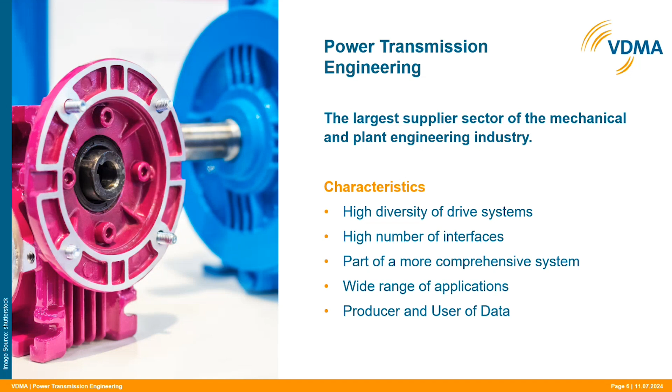In general, power transmission engineering is the largest supplier sector of the mechanical and plant engineering industry, with a high diversity of drive systems and a high number of interfaces. It's often part of a more comprehensive system and has a wide range of applications. We are on the one hand the producer of data, but on the other hand also the user of the data. For this, we have quite a central role in the mechanical and plant engineering industry.

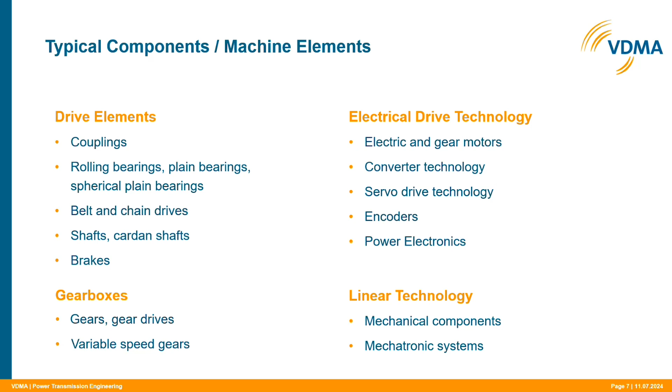In the VDMA alone, in our Drive Technology Association, we're representing over 200 member companies. This means we are covering approximately 85% of the German power transmission market. Members of our association employ over 90,000 employees in the sector. We have a turnover of 18.2 billion euros. The exports are 17.3 billion euros and the imports 10.2 billion euros, and that's only the mechanical part, because in the VDMA we only have statistics about the mechanical drive technology components, so the electrical drive components should be on top.

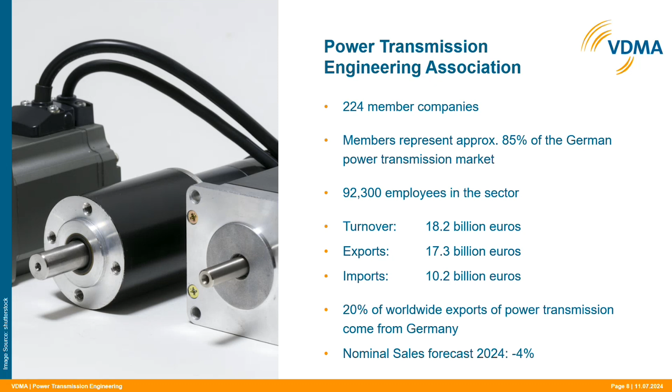Worldwide, power transmission engineering from Germany has an export rate of 20%, and at the moment, the forecast for nominal sales for 2024 is minus 4%.

Let's take a look at the reason why we started the standardization and also the use cases we addressed. In general, why did we decide to become active in the field of OPC UA? Industry 4.0, in the overall context, offers the potential to establish new opportunities in terms of process optimization, new business models through digitalization and the networking of products and production, and hierarchical communication is dissolved within Industry 4.0 processes in favor of seamless networks.

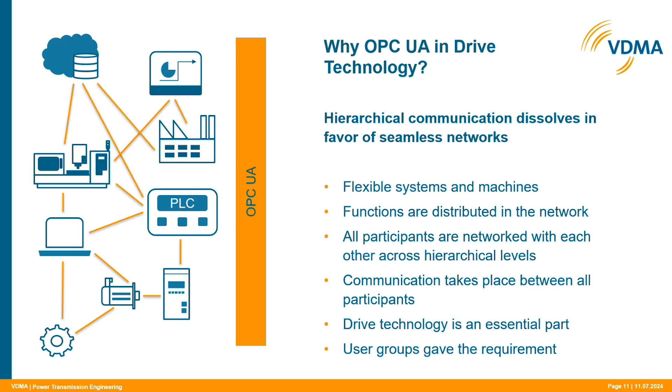The motivation for starting the OPC UA activities was based on the discussions, challenges, and wishes we received from the user industries. So our aim is to reduce the engineering effort by using cross-manufacturer interoperable information models. We want to add additional standardized services for OEMs and plant operators.

We want to ensure a seamless integration of our companion spec for the powertrain in other industry-specific OPC UA companion specifications. And we want to focus on user-centric use cases for vertical communication in the production. We quickly realized that drive technology is such a central field that a high degree of networking is necessary to involve all the stakeholders.

For this reason, we reached out to other groups and got in contact. We have a close network with the FX Motion Working Group within the OPC UA field level initiative, but also with other working groups here in the VDMA and with standardization groups like IEC groups.

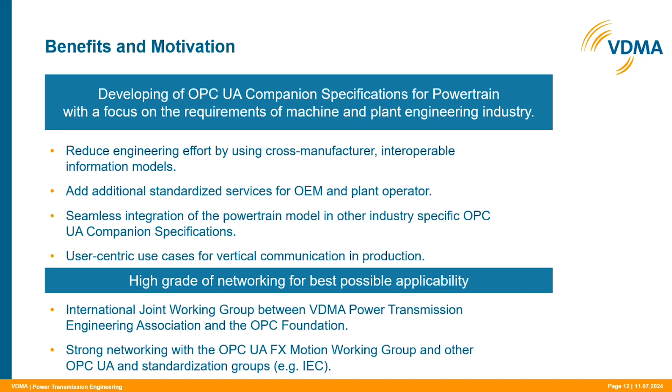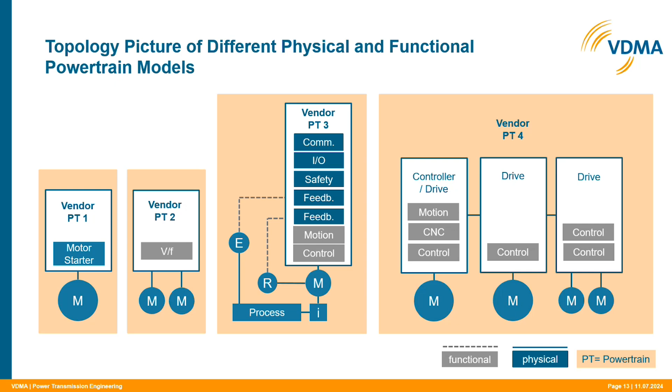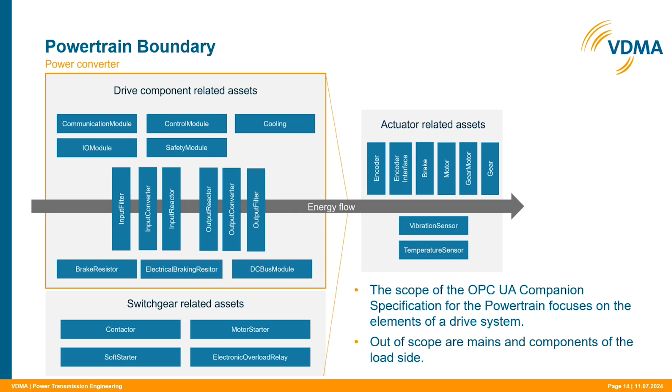For the motor, we have different parts in our specification. We have linear motors, rotary motors, drive integrated motors. So we try to cover everything which is possible to combine, and also the gear part. What we didn't want to address is the mains area, and the load side we also don't describe in our specification. So this is the complete system we are covering with our specification.

Regarding the use cases we collected, the information model of the powertrain addresses user-related use cases based on vertical communication from the field level up to the cloud. We talked a lot with user industries of drive technology about the main topics. It's important to say that we have split our companion specification into several parts, because we collected so many use cases that we were not able to put everything in one companion specification and wanted to work on the basics in the first step.

Part one of the companion specification for the powertrain provides cross-manufacturer information that enables asset management applications for the user. That means the companion specification provides static data of the components and assets of a powertrain, like the part number, the brand name, serial number, and much more, which can be found in the catalog data of the components.

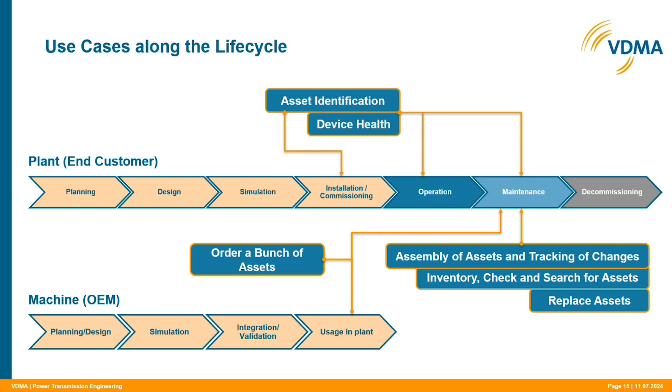The device health is also included and is inherited from the OPC UA specification 10000-100 device integration. So that we also included, and then it's possible to do such sub-use cases, but also other use cases in the asset management area, which you can see here. So this was the information on the use cases and the reason why we did the standardization work.

Now we take a look at the base information model of our specification. As I said before, part one, the asset model for the use case asset management, is completed from the content side. We are at the moment working on the last points for the machine-readable node set, but this will be, I guess, released during the summer. So the specification will be available shortly, and then we will go on with the second part of our specification for the powertrain.

Yeah, and here you can see the base structure of our asset structure and information model for the powertrain specification. So due to the complexity of the real-world powertrains, the information model must be highly modular, and in this way we defined asset types. These are the types which are related to the orderable parts of a powertrain, like a motor or gear or drive or a sensor. And these asset types are used as containers to collect the relevant asset attributes, the catalog data, the typical static data which is available for that product.

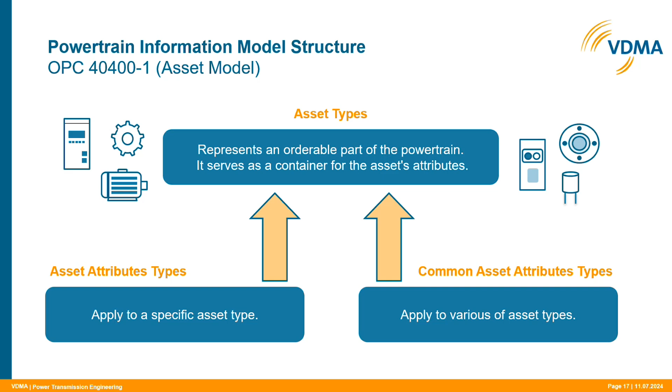So this is the base structure. I guess it's quite simple, but there was a lot of work to do because we had so many products which we had to cover here.

Yeah, here you can see in this slide the base asset type which we defined, which is a basic type for all assets in the powertrain. And the general assumption here is that any VDMA companion specification shall be in line with the OPC UA for Machinery. And as you can see here in the picture, we did that and used already defined things in the OPC UA for Machinery part.

But we also want to make sure that we are compliant with other specifications like the FX motion specification, and that the working group in FX motion can use our PT asset type, and therefore we are also compliant with OPC UA 10000-081, the information model and connecting device specification, and also we are compliant with the drive integration specification here. And here we want to make sure that we are seamlessly integrated with other specifications, and that it's possible to use our specification also in other industries.

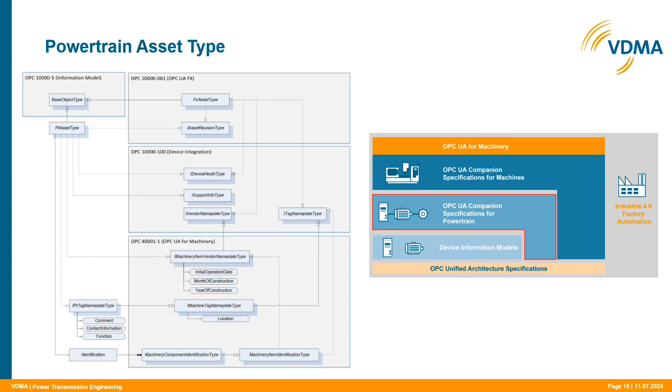Yeah, for example, just to show how this is working. So here is the example of the PT asset soft starter type. The soft starter type is a subtype of the PT asset type, and with this the PT asset soft starter type inherits some basic properties of the PT asset type, which is a mandatory property, the identification, which you can see below. And then there are optional properties which can be inherited if it's necessary, which are optional from the base PT asset type.

And then for sure the PT soft starter type has the mandatory PT soft starter attributes type, which is a subtype of the PT attributes type. And also maybe this PT soft starter type has optional properties which can also be used, like the PT communication interface attributes type. And in this way, it's possible to define the different application solutions which exist in the powertrain, and also different powertrains can be modeled like this.

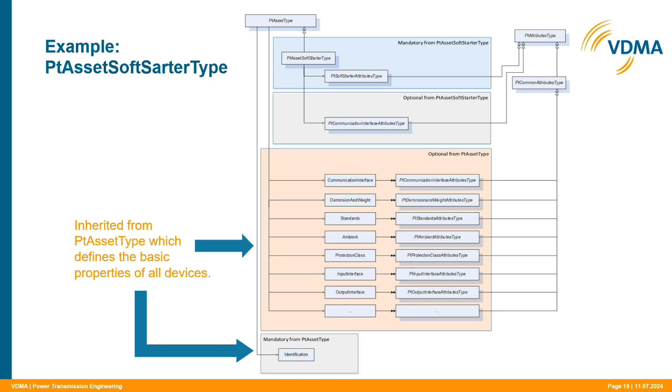What we also did is that we integrated references to data standards like the IEC Common Data Dictionary. So for that, we made some additional references for our properties. And we worked here together with the IEC standardization group for the switchgear related components. And in this way, it was possible to reference our properties directly to the IEC CDD database.

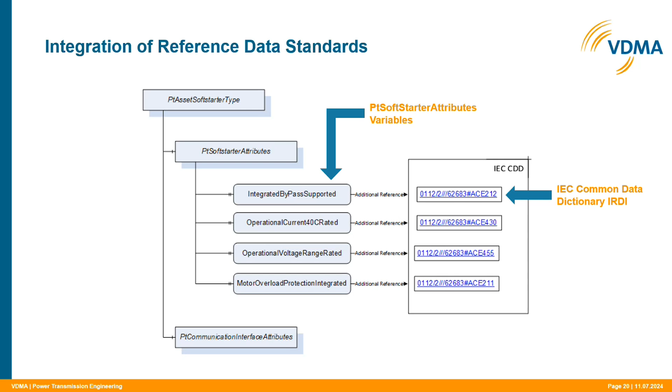And with that, I would say I'm finished with a basic overview of our information model, and would hand over to Dr. Oliver Barth, who will show some ideas and practical implementation examples of how our specification can be used. Yeah, thank you very much, Tobias.

So you heard about the motivations and the theory and the node set we built and specified. And of course, the main question is, how can I use all this in the practical world? First, we give you some ideas how to use it, and also we have some examples of the members of our working group, how they use the work results. So if we are going to the next slide.

So the question was, what is a good example where we can show the usage of the companion specification? And I think what you all might know is the nameplate. It's a typical nameplate you find on each and every motor, for example. And it holds the typical data you need to look up and characterizes the motor. So as you know it, the motor type is shown. You see product code, serial number, duty type.

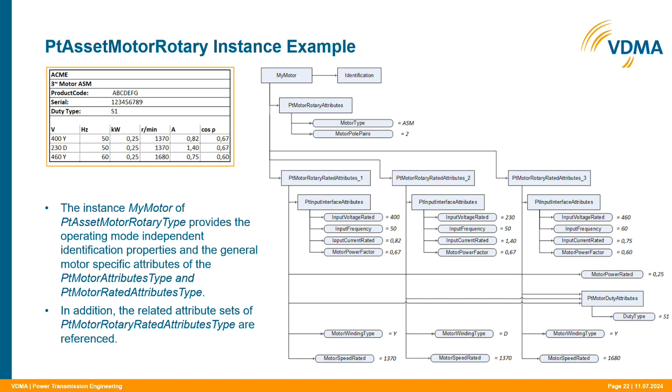Good. Now, the companion specifications are not synchronized in time. Some come early, some come later. And of course, it's also possible that you already have decided to develop an OPC UA model for your own, because you see the advantages of interoperability, and this model exists now. And you may have a powertrain part device already. So how can you handle the problem, or no, it's not a problem, but now we release our specification of the powertrain.

Is there any possibility to not throw away your existing work? And the good news is yes, there's a possibility. Everything that you already developed can be used, and the workflow is as follows. You have to derive from your existing object type. I hope you can read it. So you have an existing asset type in green in the gray box, and you derive a new enhanced motor asset type. And this motor type shall use parts of our specification. You can completely decide which parts you think are useful, and then you enrich your derived model.

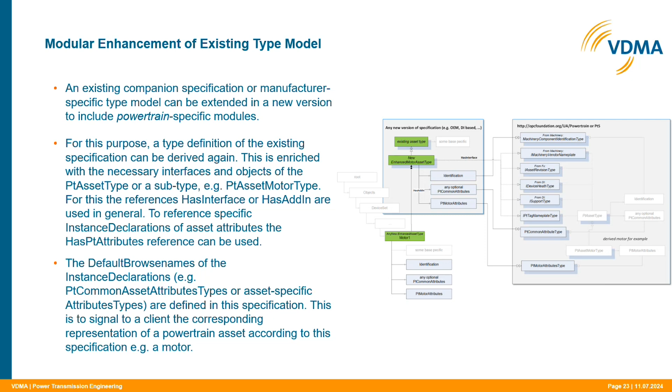So we already created default browse names, and if you include just an attribute of our specification, you will see the reference to the specification by the default browse name. And also, if you include an attribute from our specification, there's a special reference which is called HasPtAttributes. So this is some more convenience to use our specification in maybe existing work.

Thank you very much, Tobias. Good. Now maybe the most interesting part, how do you use it in real products? And of course, our working group, which is on the subject now, let's say for 5 years, has a purpose to put it into our products. Of course, this is a lot of work and we want to have a benefit from it. And here you see some examples how we will use our companion specifications.

The first one is from company Wittenstein, where I am from. So we have a small servo drive portfolio. It consists of servo motors and inverters. And here on the inverter side, we have the possibility to integrate the specification. So we have a special ASIC, which is just for communication. So that's why we have all the interfaces like EtherCAT and Profinet and Ethernet IP and so on. And this also allows us to implement an OPC UA server. And this is done at the moment.

So for us as a component supplier, it is mandatory to be connective. We don't sell controllers, and our success is dependent on our connectivity. And OPC UA is an excellent addition to the existing real-time field buses. And of course, what we have provided now in the working group is asset management, but we will add some more use cases, which we'll introduce in the next slides.

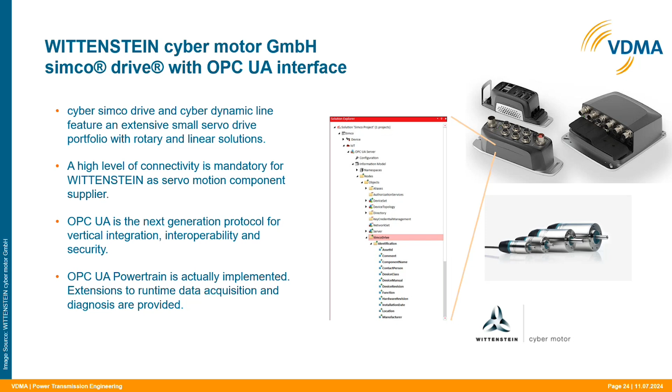So this was an example from Wittenstein, and the next slide shows an example from Siemens. And also, I think it's noteworthy that Siemens equips all the drives now with an OPC UA server. So this is standard now for Siemens. Also for them, the asset management was one of the main drivers to do it. And as you've seen, the asset management was one of the first topics we implemented here.

But as the slide is created by Siemens, they also show the other intentions. And as you can see, it's in the field of condition monitoring and quality management and so on. And again, in parallel to the real-time field bus, they provide their own OPC UA standardized interface in all their drives. So that's interesting, I think.

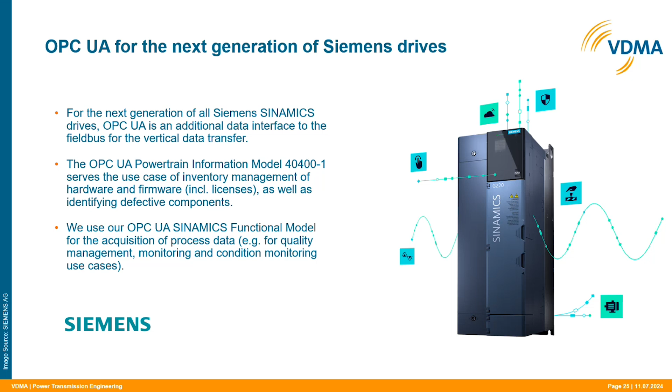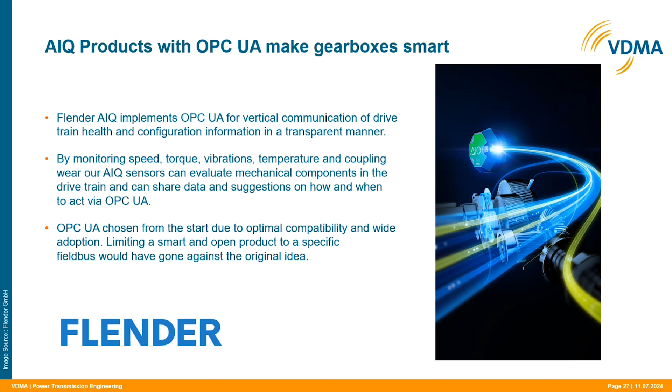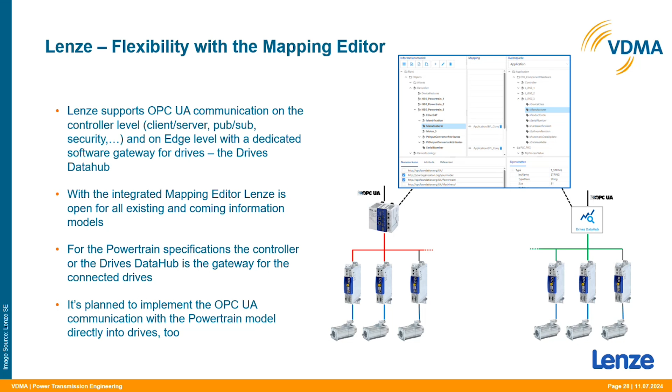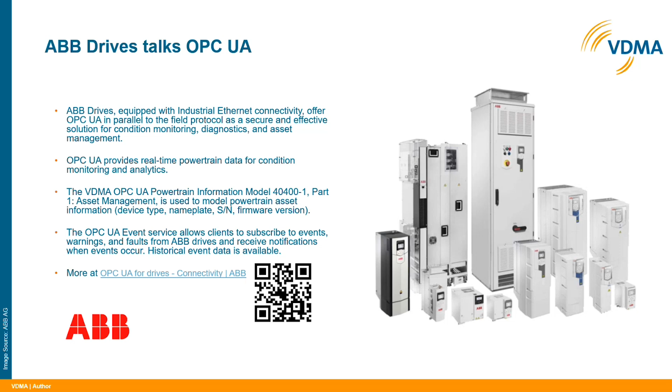ABB already did a little more. They also have events which are part of the OPC UA specification - you can be notified if some limit values may be reached or so on. This is all a parallel implementation to the real-time field bus. Thank you.